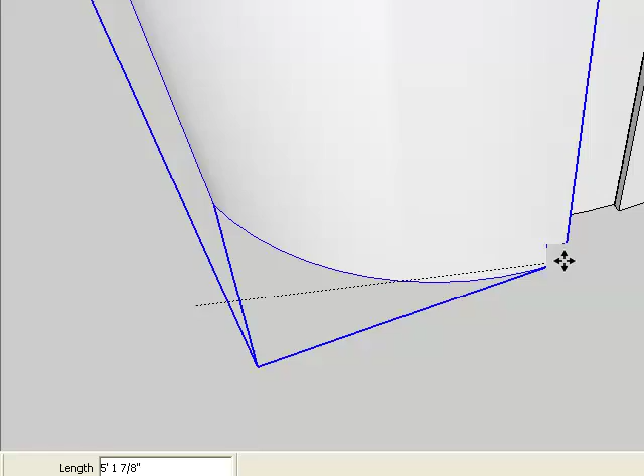Getting a little closer so I can see it pop together. There it goes. And now we have both the outer and inner caps. I'm going to come in close again and see how these line up here, if there's any gap or space. A tiny bit.

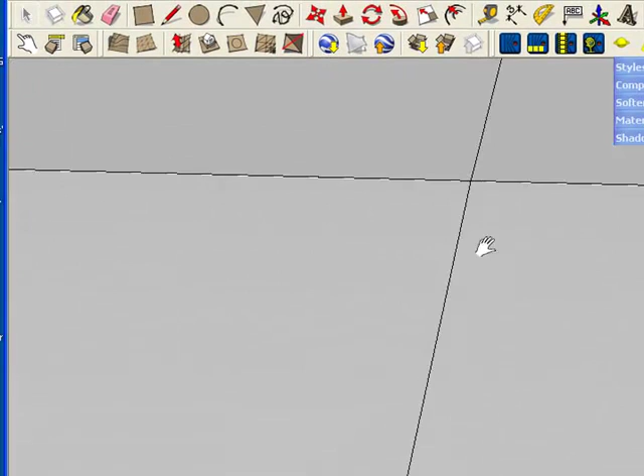So I might want to do like I did last time, get as close as I can in here, click on one. Nah, I really think that's good. I think what it is sometimes you get a little kind of halo effect next to the line. Click on the zoom extents to get us out so we can see our whole trailer.

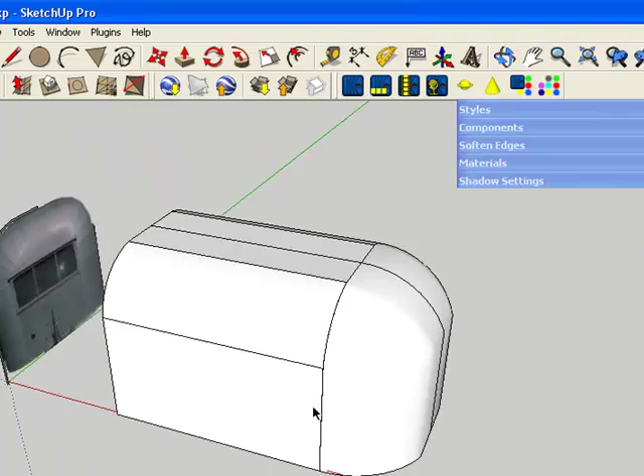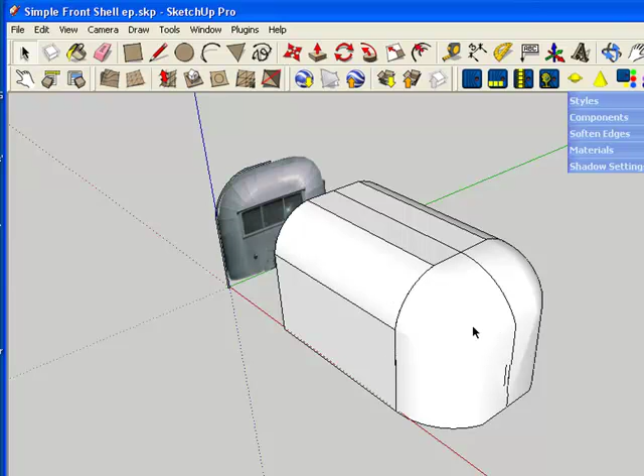And there we go with our two caps. Now, for just a simple trailer, and it's not exactly a pure Airstream because we designed it to keep it simple, we could just duplicate these and reverse them and stick them on the other end, and we'd have a whole shell. So some of you out there might just want a simple shell to work with, and that's a quick, easy way to do it.

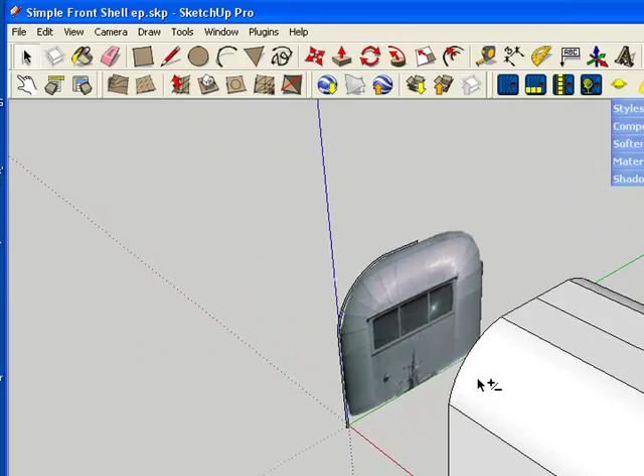You wouldn't have to go through all this process again. However, what I'm going to do at this point is show you how to put the window in here. So we're going to go back to our original image of the photograph.

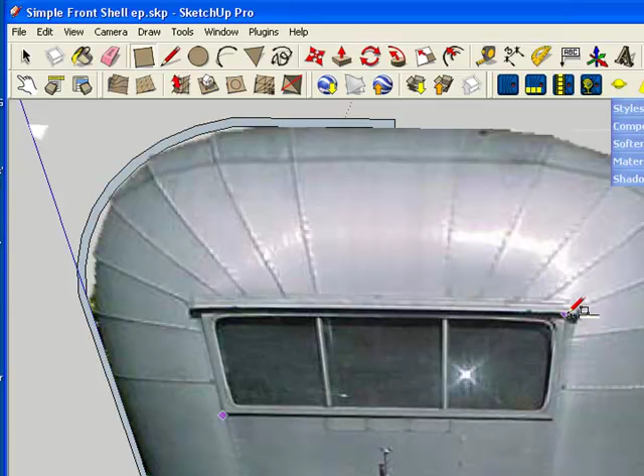What I want you to do is take the tool up here that makes a square or rectangle, click on it, come down to the bottom corner, click, drag across to about this corner, and release. And we should have, if you look on the back side, there's the box we just drew.

Alright, now we want to bring that box clear through to match up with the front of the shell. And since we've kept everything lined up, this should work pretty well. So I'm going to highlight it.

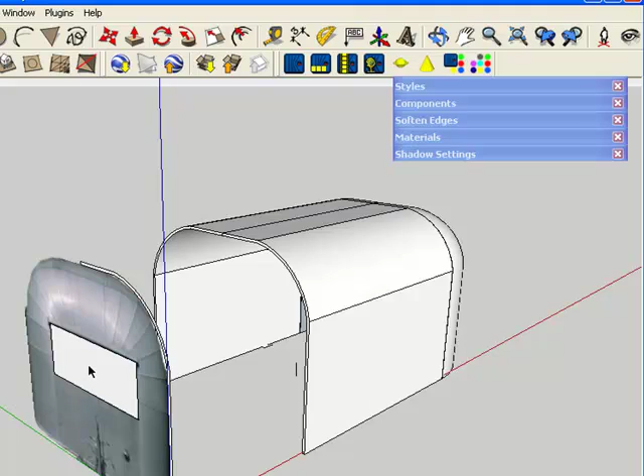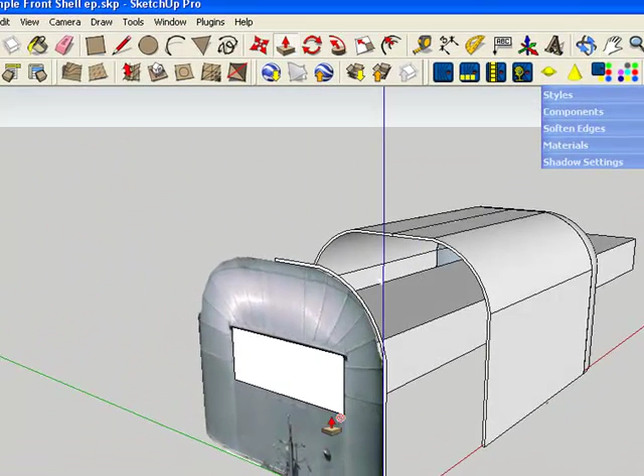We could come up and pick up the pull tool or push the P key. What I'm going to do is extend this just all the way up and out the front of the trailer, like that, so it's shooting right straight through the trailer. And I'm even going to take this and drag it up closer so it's not quite so big. That's just because I like to do it. It isn't really necessary. I want to bring this in a little bit.

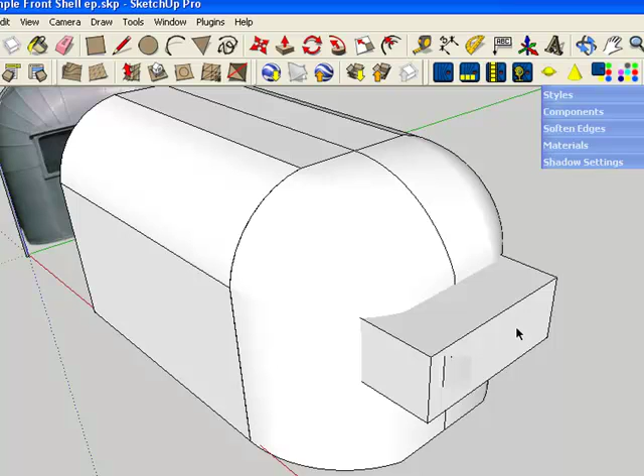Alright, now this is how we create our windows and other holes and openings that we need to put in the shell. And that's one of the reasons I ask you to take pictures of the front, the back, and the two sides of your trailer, because when you start making your actual trailer, we'll be using those to create the openings in your trailer.

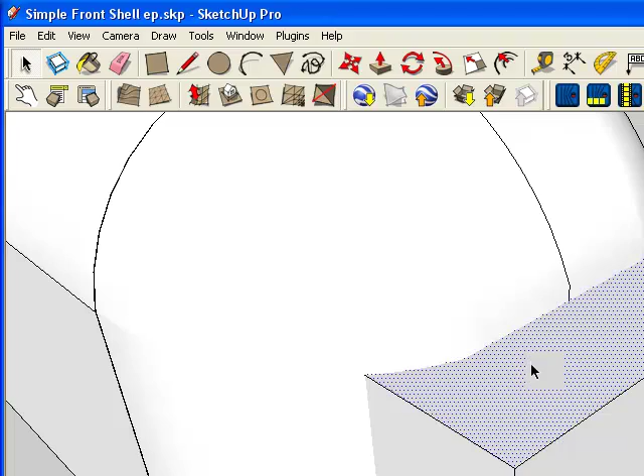And here's the key. Notice how this shape has no line like everything else has a line. It tells me that this is not an actual intersect, and I need to make it that way. So I'm going to click on this surface. Alright, and when I have the surface, remember, right click, come down to intersect, intersect with model, and I get a line. So now there's a division there.

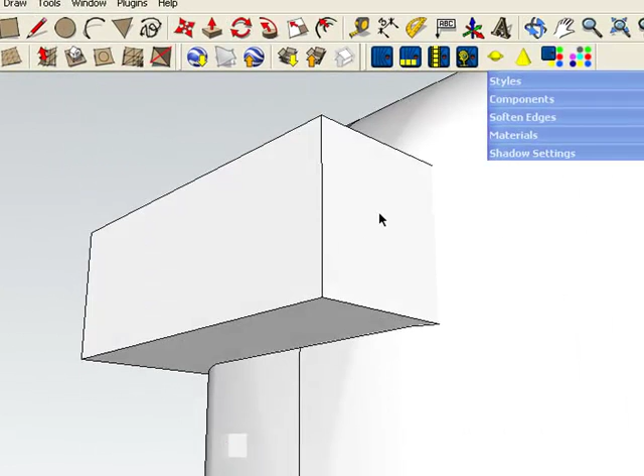Let's do the same thing here, underneath. And again, left click on the object, right click, come down to intersect, intersect with model, release, and the job is done. Now we also want to do the same thing to the shell.

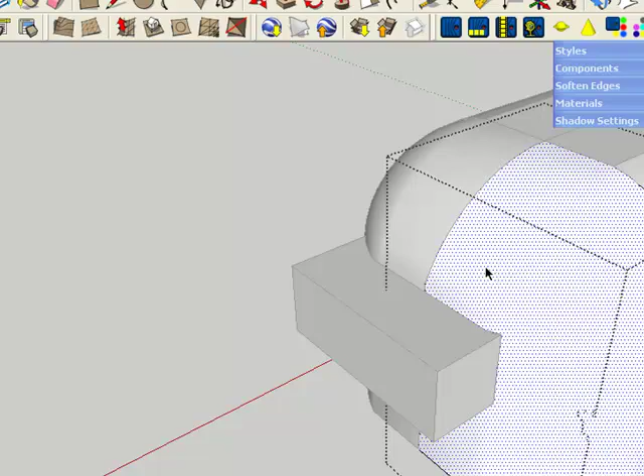So I'm going to click on the shell, and I'm going to click on it till the whole thing is highlighted. Now that's one of the advantages of smoothing, is it makes it essentially like it's just one shape rather than many. So again, right click, intersect with model. Let's do this one. Right click, intersect with model.

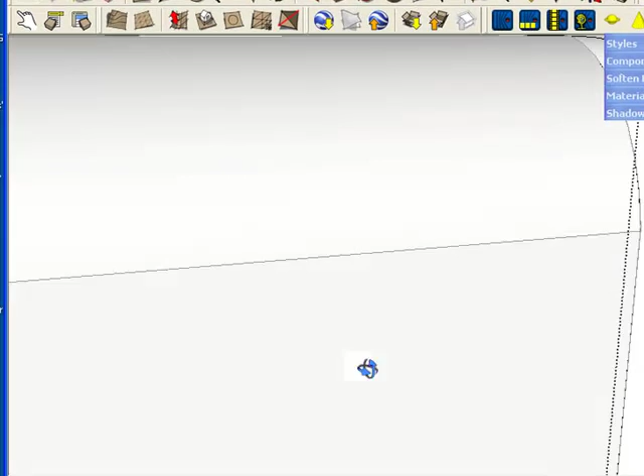Okay, so we have assured each side of these are connected, and what we need to do now is go on the inside and do the same thing. Now one of the things that you can do is you move up close to the outside and then click your rotate button and rotate and pull over. We can get ourselves inside.

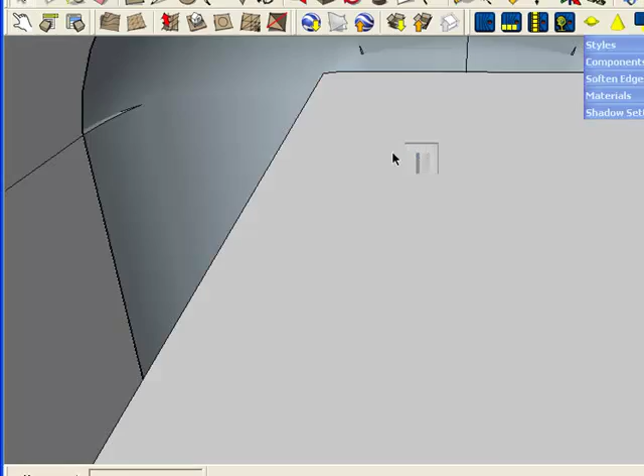Alright, so I'm going to click on this. Okay, I may have to make sure I'm deselected with everything, this is a gray area, remember. It looks like we've got a line here, but I'm going to double check. Let's click it. Again, right click, come down to intersect with model and release. Okay, now that's good. It means we need to do it.

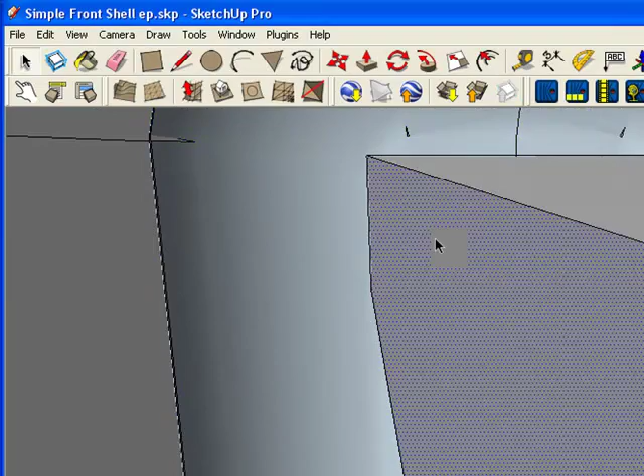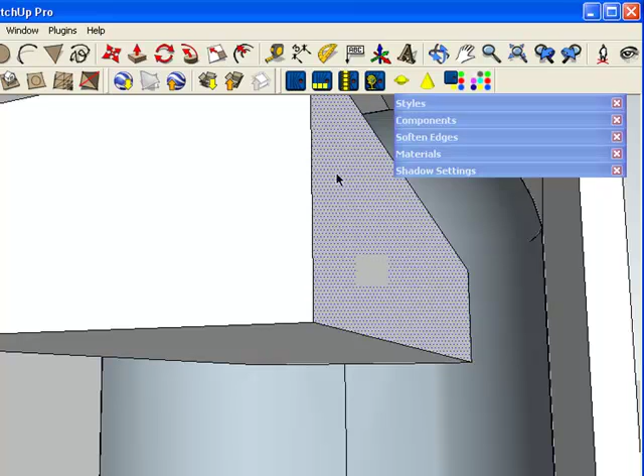If it doesn't need to be done, you'll get a message to that effect. Okay, go to this surface, intersect with model, sneak down underneath. Intersect with model. Intersect with model.

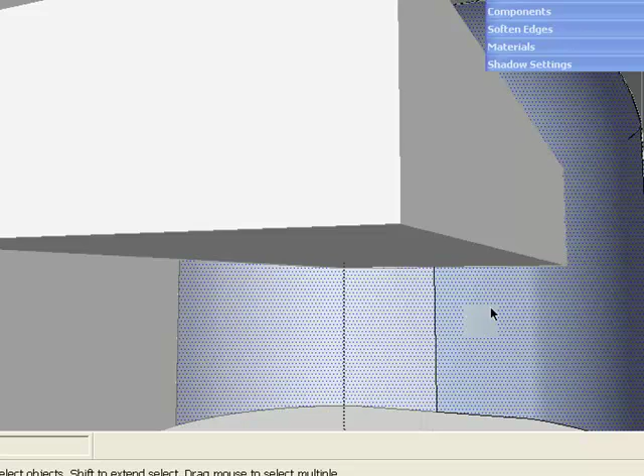Now again, I'm going to go down to this gray area, this is actually background here. Deselect everything so I can come back and pick up the inner shell. Okay, the inner shell is going to do both sides at the same time. I'm a little leery of that, but let's see how it works. Right click, intersect with model, and there we go.

Now the first thing we're going to do is go back and click outside so everything is deselected. Come back and click on the ends of our box and delete the ends of our box.

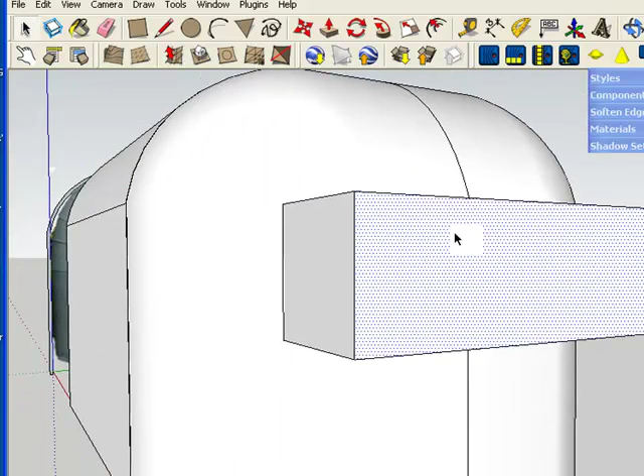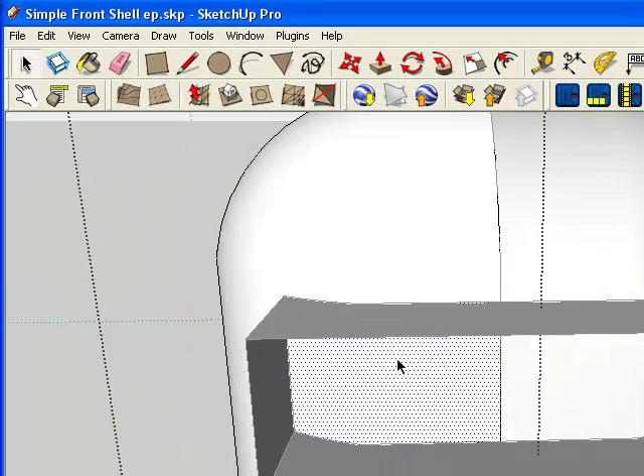Now, what I want to do is make sure at this point, I could get rid of all of these, but before I do that, I want to make sure everything has been separated. And so if I come in and click on the shell there, you can see how only that part lit up, so that means that's separated.

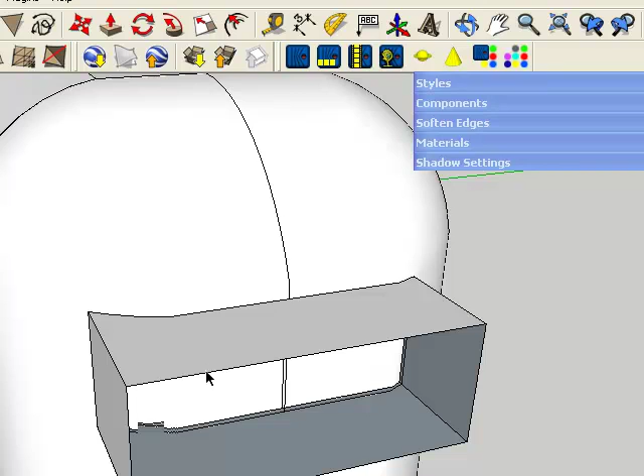I'm going to delete that. Let's do the same thing to the other side. Yep, delete that. Now, since we know that the outer shell has been done, we can come back and click on the gray, and I can eliminate this part of the box because I know we successfully have created our separation.

And the other thing that works nice about this, if you do it carefully, you'll notice we also end up with a little piece of the box left in between our two shells, and so that fills the two shells in as far as the space goes there.

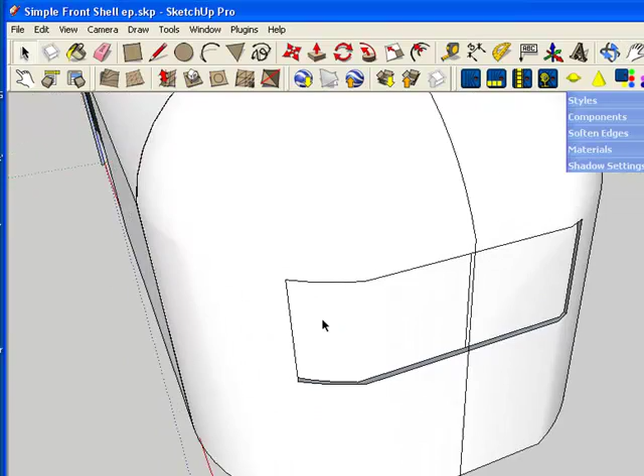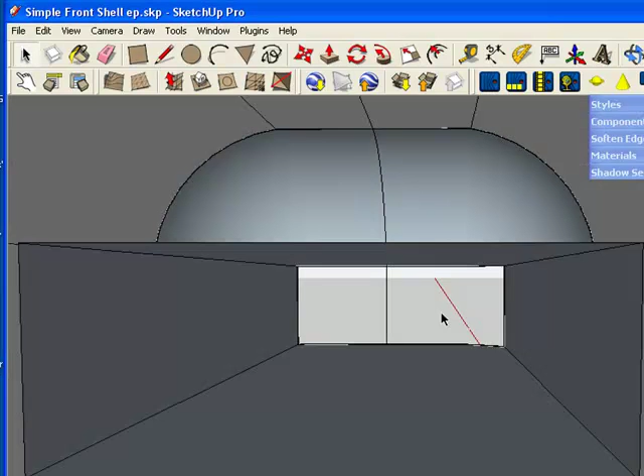All right, let's wheel around to the inside again, and we're going to check to make sure that these things are separated. Nope, see, there, nope, there it did. Okay, I had to click it enough times to see it, but it's separated, so I'm going to delete it. And now we can see right out the front of our trailer. So what we're going to do is get rid of the rest of this box.